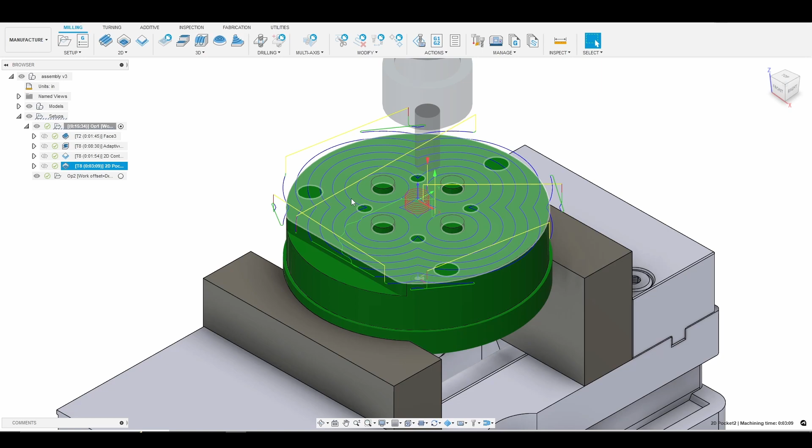This is the third tutorial for our microARC Vise fixture plate. What I've done here is set up ahead of time a 2D pocketing toolpath, which we will delete. If you watch the overview video, you'll know I mentioned I was not a fan of the surface finish I was getting using a standard pocketing toolpath, so I wanted to explain what was happening and why I didn't like it.

If we look at the toolpath, you'll notice as the machine walks around the outside contour of our part and works its way in, there are spots with a rapid change in direction. The machine has momentum, and the Tormach cannot transition instantaneously. So when it gets to these direction changes, it dwells there and you'll see a swirly tool mark. I was not a fan of that, which is why I decided to move away from the pocketing toolpath for the top of this part.

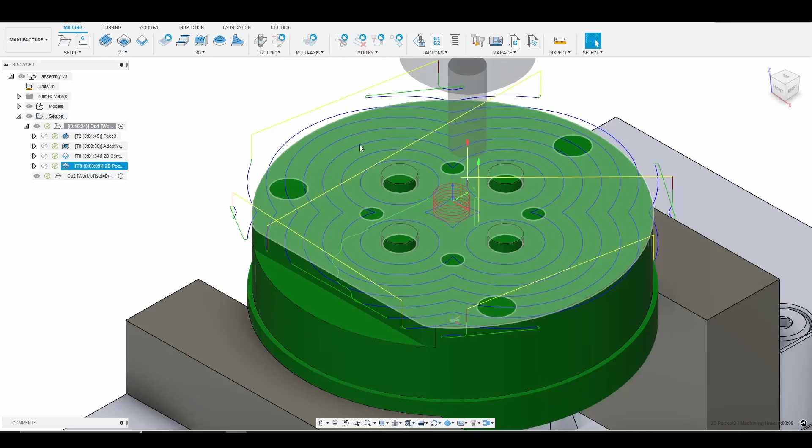Instead, what I discovered was a 3D flat toolpath. This is the first time I've used this toolpath, so I'll walk my way through it, and we'll examine the surface finish and see why I liked it better than the pocketing toolpath. So let's go ahead and delete the pocket.

Now we'll go ahead and create our 3D flat. We'll go up here to 3D and hover over 3D flat. With all of the 3D toolpaths, Fusion 360 takes our geometry into consideration, so it's going to find all the flat areas in our part and finish them for us.

So we're going to select the toolpath, and again we're going to select the same 3/8 inch 3-flute Gorilla Silverback end mill. We'll select OK. We're running at 7,500 RPM since we're finishing. I'm going to leave it at 30 inches per minute. There's only 10 thou on the floor, so we could go much faster if we wanted, but again, finishing, so I'm going to go nice and slow.

In terms of geometry, normally because it's a 3D toolpath, Fusion 360 takes the geometry into consideration for us, and I would typically skip this tab. But what I want to do is enable avoid touch surfaces, and I want to make sure that we do not touch the pins.

So we'll create a separate 2D contour toolpath and enable the wear compensation. That way, after we machine around the pins, if it doesn't fit, we can enter a negative tool diameter in Path Pilot and just rerun that toolpath again, walking around the pins until they do fit. So we have the pin selected, and I'm also going to select the sidewall here.

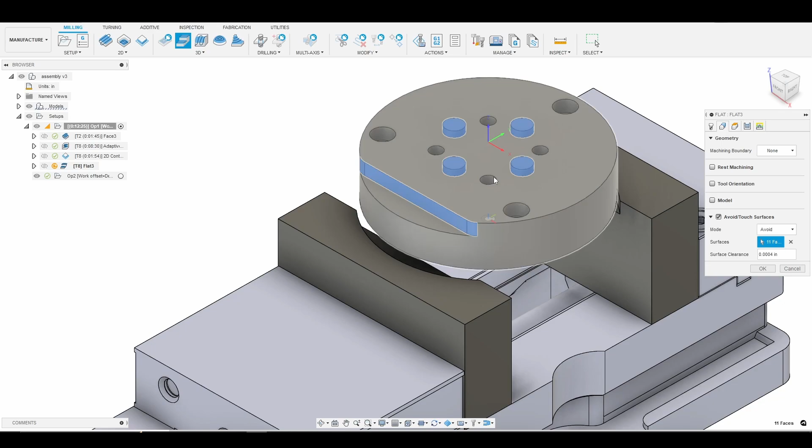Now we have the surfaces that we don't want to touch. We'll go to our heights tab, and for our top height, since we've already removed all the material off the top, we are just going to select model top.

Then we'll go into our passes tab where things get more interesting. Again, I want to avoid a pocketing type strategy, and instead I would like to do a parallel pass. As you'll see here in a minute, it gives us a more uniform toolpath, sort of like a facing operation, and to me it just looked more visually pleasing. So I'm going to go ahead and select that.

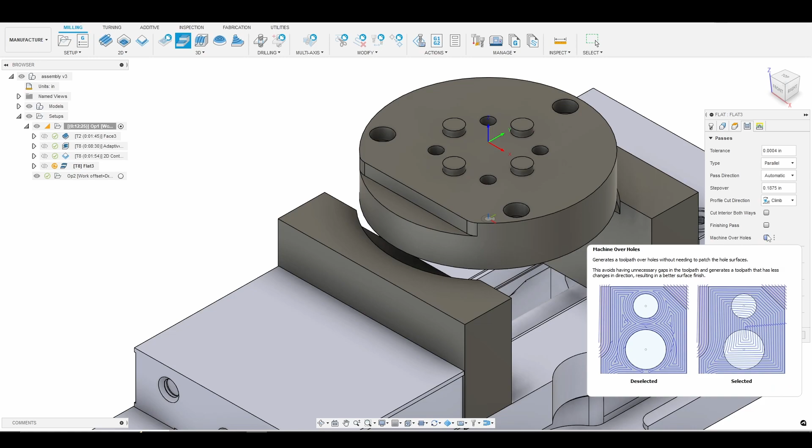For the step over, I'm going to use 50% diameter of the tool. And then I am going to select machine over holes. You see a bunch of holes that we will drill here in a minute, so if we hover over machine over holes, it literally does that—it machines over the holes instead of avoiding them. So I'm going to select that.

The next thing I want to do is go to stock to leave. I don't want to leave any stock on the floor, but I do want to leave at least 10 thousandths on these pins so that if we need to, we can walk them into tolerance. So I'm going to leave 10 thousandths on the sidewalls, and leave nothing on the floor.

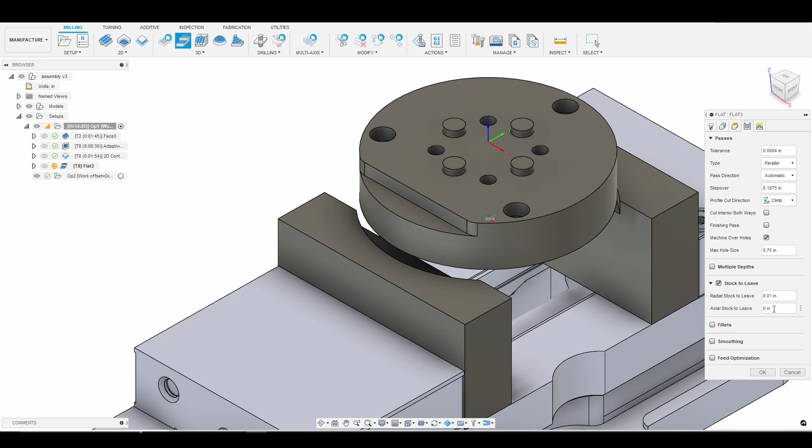I'll go ahead and enable smoothing and feed optimization, and that should do it for this toolpath. So we're going to go ahead and click OK. Give Fusion a minute to generate it, and now again we'll just go ahead and right click and simulate, and we'll just sort of look at what happened.

Slow it down a hair. So there we go. And so you'll notice again, it's sort of like a facing operation where we're just going left to right, and it's a more uniform surface finish, and we don't leave those tool marks all the way down the part going toward the center.

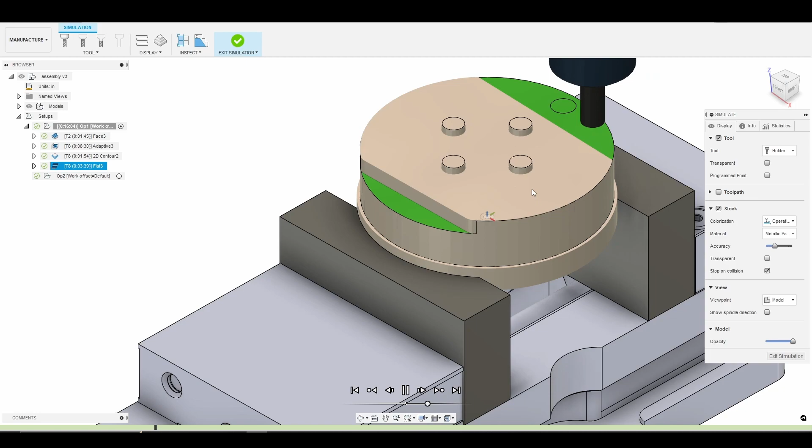All right, so what I'll do now is I'll just go ahead and speed it up a little bit so we can get through it. Again, it's avoiding the pins. It will go through here in a minute and just clean up that excess stock, but it does avoid the surfaces we told it not to touch. There we go. So we'll go ahead and exit.

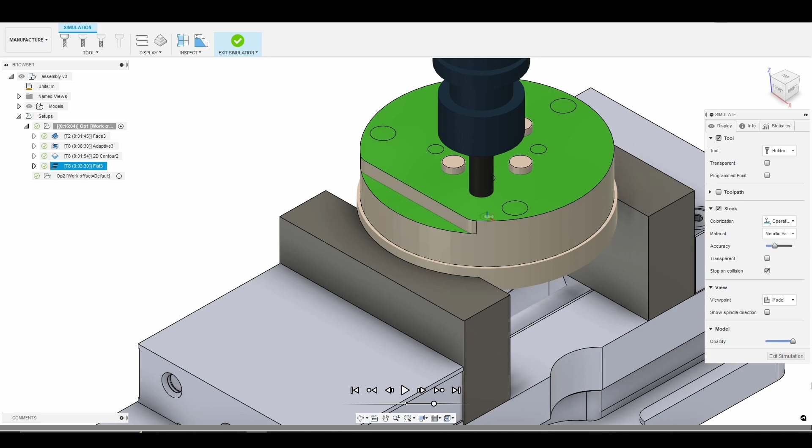So that does it for the 2D flat. So I hope you guys enjoy that.

So what I'm going to do now is go ahead and create the 2D contour. So we will go up to 2D, again, contour. And then what I'm going to do is, of course, select the same 3/8 inch Gorilla Silverback 3 flute. Select OK for finishing. So I'm OK with leaving it at 30 inches per minute, 7,500 RPM, little over 1 thou per tooth.

Going to go to geometry, and all we're doing here is finishing the pins and this sidewall here next to the flat. We'll go into our heights again, model top. We've already faced all the material off the top of our model. And now we'll go into passes.

And what I want to do here is I want to enable stock to leave. And so what I want to do is avoid touching the floor that I've already finished. So we're going to leave no radial stock on the sidewalls, but we will leave 1 thou on the floor just to not touch the surface that we finished.

The next thing I want to do is change the compensation type again to wear. That way we can enter a negative tool diameter in Path Pilot. So if for some reason after we machine the pins they're too big, we can just walk them into tolerance.

And what we want to do is just go ahead and spot drill all of our holes. So I'm going to select a tool, go to my Tormach 770 library, and I want the 1/4 inch spot drill. It's 140 degrees to match the drill point angle on all of my carbide drills. So we're going to go ahead and select that, select OK.

Everything here is fine, running at 5,000 RPM, and we're just plunging at 13 inches per minute. So what I'm going to do now is go to geometry, and we're just going to select all of the holes.

All right, so that looks good. The next thing I want to do, and we could have selected same diameter if we wanted, but I just clicked on all the holes. It was rather easy.

So we'll go to our heights, and now we want to be careful here. We don't want to go to tool bottom. If we tried to plunge that spot drill all the way into the bottom of the hole, we are going to crash our machine, ruin our part, and break the spot drill. So what I want to do is I want my top height to be the top of the hole. That's fine. And then I want my bottom height to be the top of the hole, and I'm going to go down 45 thousandths just to get the drill point in the top of the hole. And so I need a point there. So that should be good.

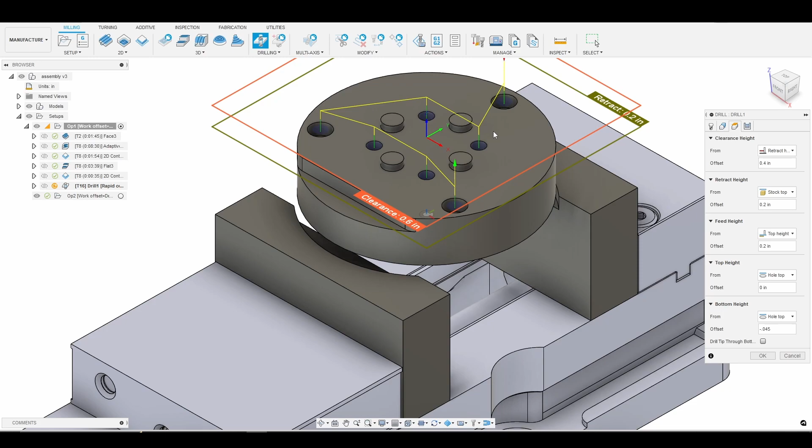So now we're just going to drill in and rapid retract and make all of our spots. Yep, drilling with a rapid out, so that's fine. Again, we'll let Fusion generate the tool path and we will go ahead and simulate.

Go ahead and press play. So there we go. We just simply went through and spotted all of the holes, nothing major here. So now what we want to do is we want to go ahead and do our deep drilling cycle where we go ahead and peck all the way through the part. So we'll do that now.

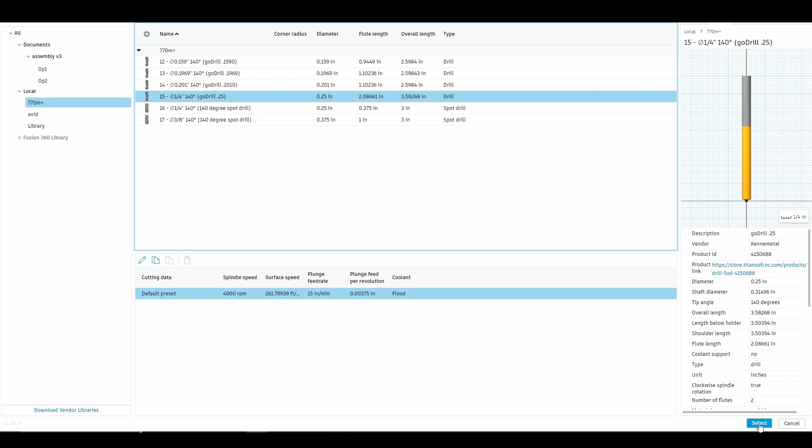So I am going to go to drilling again, and this time we are going to go to the Tormach library that I set up and choose the 1/4 inch drill. And again, this time we were at 4,000 RPM and we're plunging in at 15 inches per minute.

I'm going to go ahead and again just sort of click all of the holes. So to save time, I could have duplicated the spot drilling toolpath and then changed the tool and changed the drilling operation, and it would have left the geometry selected for us. So that's something I could have done to save time, but there's not a lot of holes, so it was easy to just go ahead and make a separate toolpath.

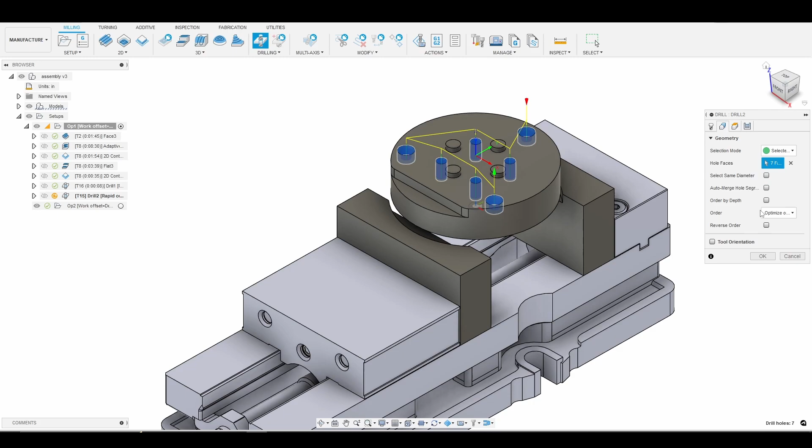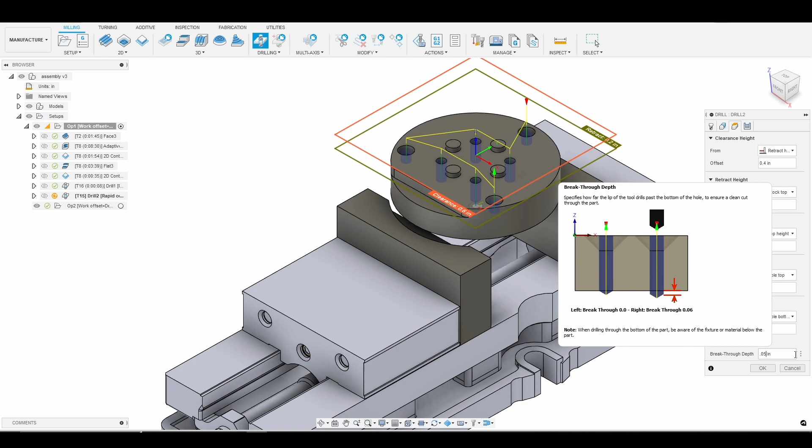All right, everything here looks fine. What I'm going to do now is go to heights. Now here, the only thing I want to do, so we do want to drill from the top of the hole to the bottom of the hole, except I want to drill the tip through the bottom, and I'm going to go an extra 50 thousandths just to make sure that we break all the way through the hole. So if I hover over this, it should explain. So we're just making sure that we go 50 thousandths past our drill point. That way we go all the way through and we have a nice exit in terms of our hole. So when we go through on the backside and do the chamfer, we won't have to worry about there being any large pieces of stock or anything like that left over.

All right, so now we'll go to cycle, and what we want to do here is we want to go deep drilling with full retract. Pecking depth, I am going to change that to 30 thousandths. Okay, so that should do it.

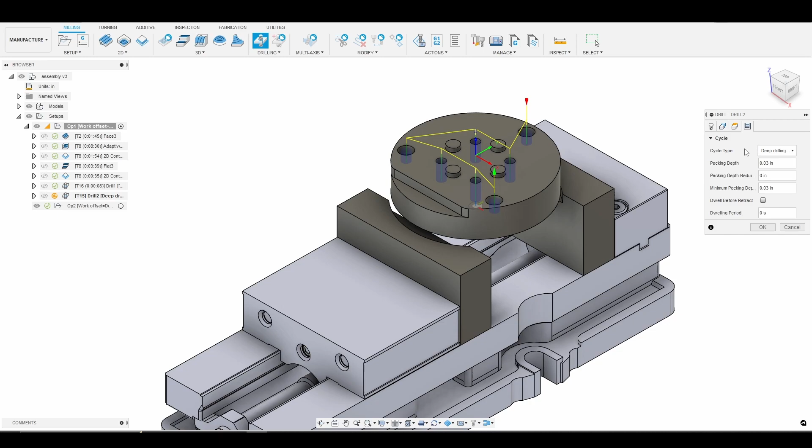So we'll just go ahead and click OK, and then again we'll simulate. And what I do like to do with the drilling is I like to use flood coolant just to make sure, especially, I mean, I'm drilling right around an inch. So I'm going an inch deep essentially into this material, and I want to make sure that I have decent chip evacuation. So I tend to use flood coolant when I am drilling rather than using the fog buster.

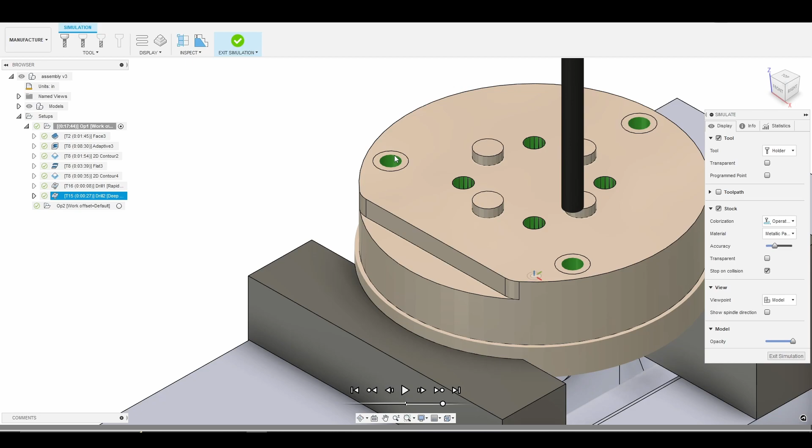So we'll just go ahead and simulate. And so what we're doing is just going through and pecking our way all the way through. So we'll go ahead and speed it up a little bit. There we go. And so the next thing we want to do is we want to go ahead and clear out the countersink here. So we'll just use a pocketing operation to do that so that our socket head cap screws will go ahead and fit all the way inside flush with the top surface of our part.

So we'll go ahead and exit simulation. We'll go back to our home view. All right, so now we'll go ahead and go to 2D Pocket. We'll go to our tool library, to my 770 library. We're going to select the 1/8 inch 3-flute end mill from Shard Tools. We're going to run at 8,000 RPM, but we're going to drop the feed rate slightly and go 25 inches per minute. So we're going to be conservative, and I'll show you why in a minute.

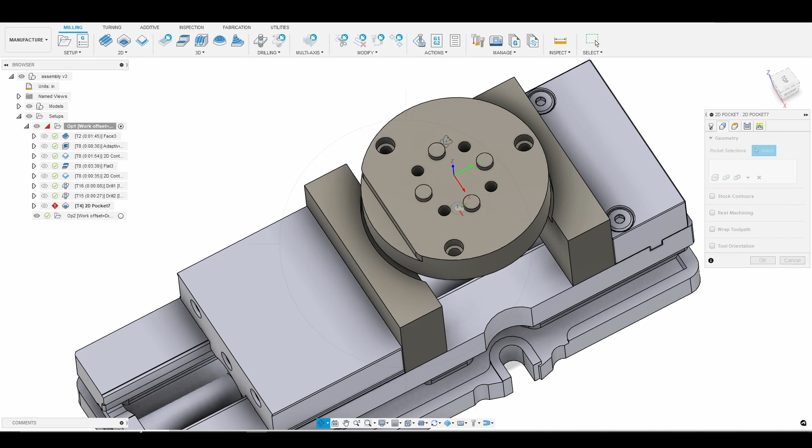We're going to go to the geometry page, and I'm just going to orbit so I can see the inside of our mounting holes. So what we're essentially doing here is we're going ahead and clearing the countersink for our M6 socket head screws. So the socket head screws should mount inside of our holes and go just a little below the surface here. That way there isn't any interference with our vise.

And we're being conservative because we're going to plunge all the way down, full depth of cut, and then work our way through the pocketing operation.

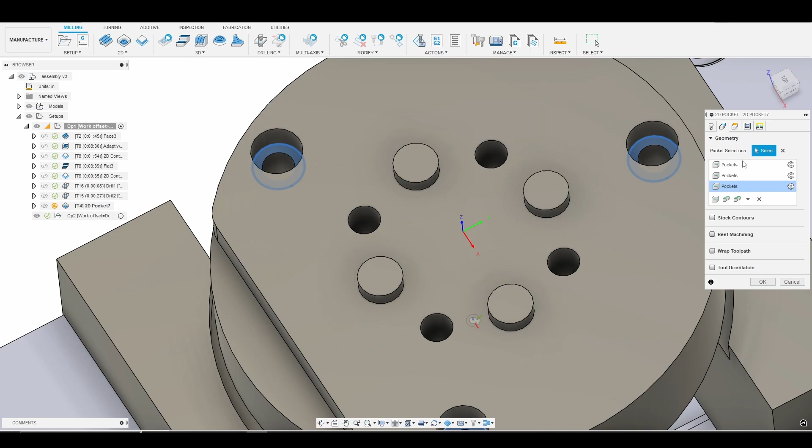Now we'll go to heights and reset our view so we can see. Again, we want to use model top, not stock top. We will go into passes.

We're going to have our maximum step over at 15 thousandths. Again, we're being conservative because I don't want to break my 1/8 inch end mill. I've already gone through 2 of them in the past week.

All right, so the next thing we're going to do is enable the finishing passes, and we want that to be 10 thousandths. And what we're going to do here is go ahead and do a 50 thousandths finishing overlap. All right, that's fine.

No stock to leave, no multiple depths. I will enable smoothing and feed optimization.

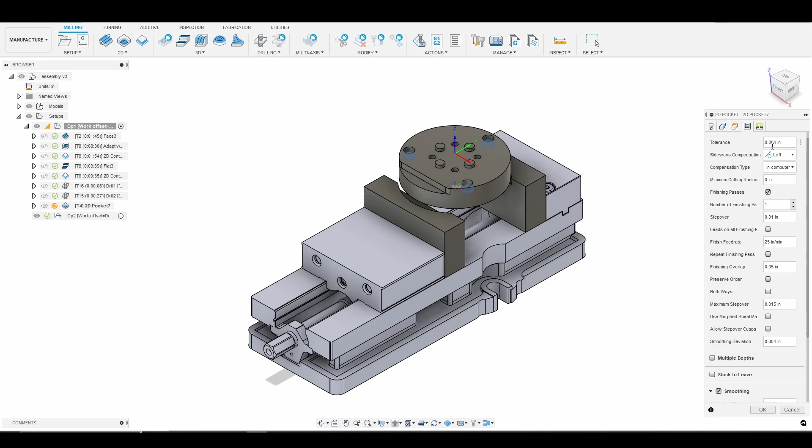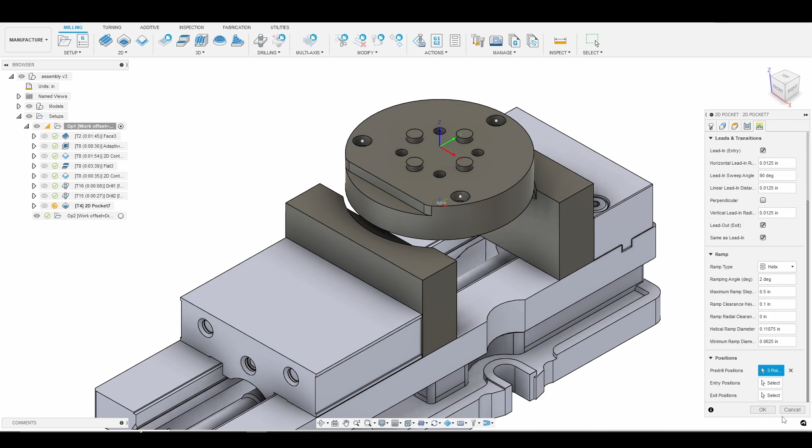So the next important thing we need to do is go to linking. Since we already pre-drilled these holes, we don't want to do a ramp or helical entry. What we want to do to save ourselves time is go down to where it says position, click select under pre-drill position, and then select the holes that have already been pre-drilled. The tool should go ahead and plunge into the center of the circles and then work its way through the tool path. That way, again, we don't have to do a ramp or a helical entry. So we'll go ahead and press OK.

And then we will simulate to make sure that that is the case. I'm going to right click, go to simulate, and then just use the timeline here. What I want to make sure of is that the tool holder doesn't contact the surface of the part. I've done that before, it's not fun.

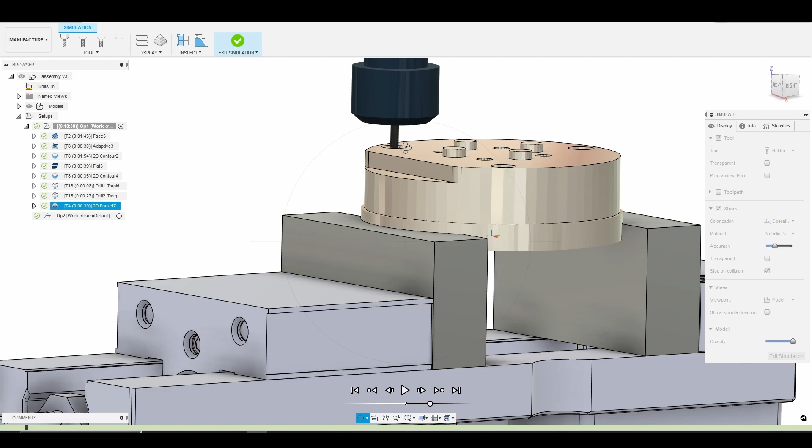And I want to make sure that as we're plunging down, we're plunging into the center of the hole and not directly into our stock. I've done that before too, and trust me, it's not pretty. So we want to avoid those sort of crashes.

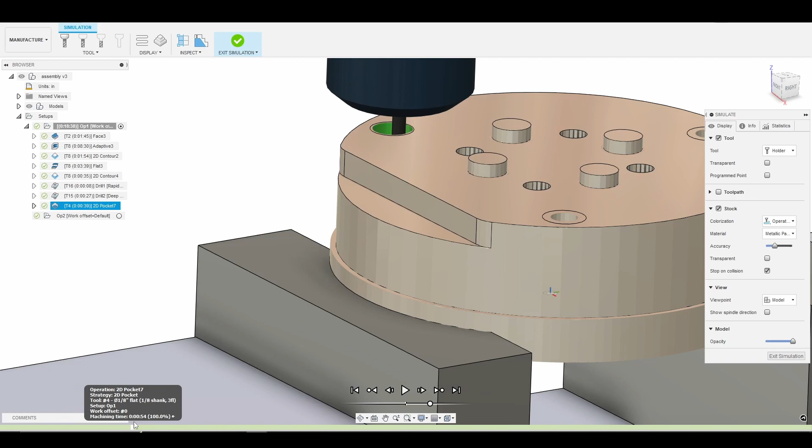And everything looks fine. We just work our way through the pocket, clearing a path for our M6 screws. We'll go back to our home view, and then finish walking our way through the tool path. So everything looks good there.

So now all we need to do is finish our Op1 by chamfering all the edges, making sure there's nothing sharp that could cut someone's finger, and making sure everything's nice and smooth with no burrs. So we'll go ahead and do that now.

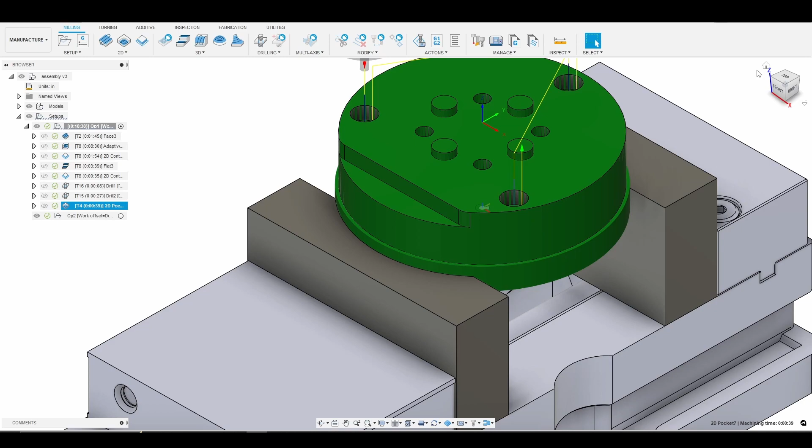I'm going to go ahead and go to 2D chamfer. Now what I'm going to do is select a 1/4 inch chamfer tool from Gorilla Tools, our lemur chamfer. So we'll select that tool.

We're running at 4,000 RPM and 20 inches a minute. Again, we could push the feed rate up if we wanted, but I'm not going to. We're right at around 1 thou per tooth.

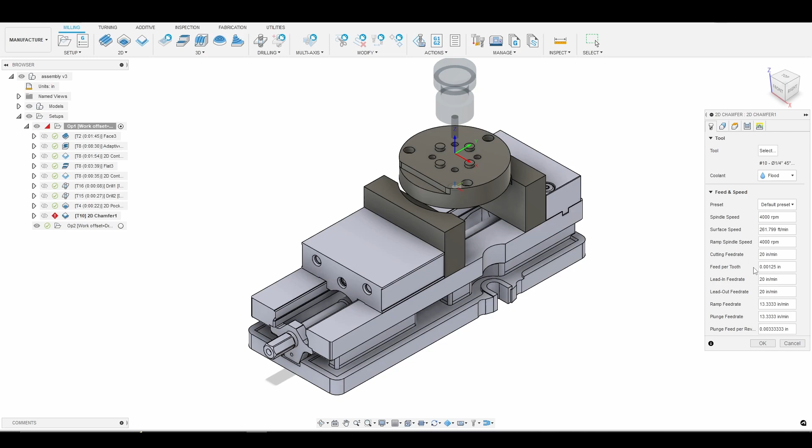For geometry, we are going to finish essentially all of our edges around the holes, around the outside of the part, along our flat. And we're also going to chamfer the top of the pins. Okay, so that should do it there.

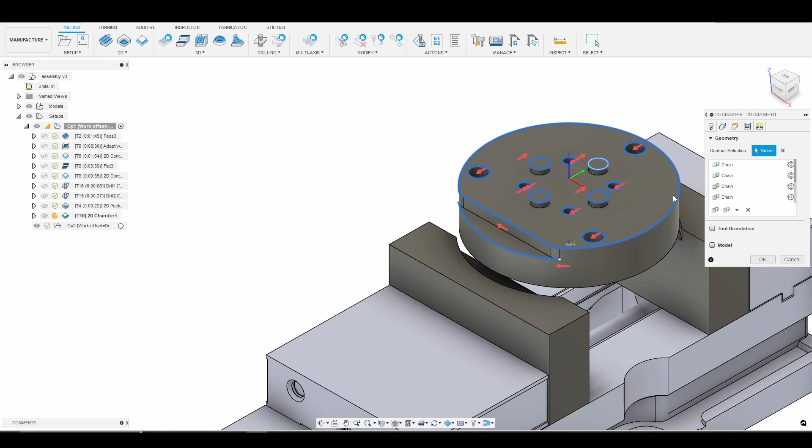The next thing we'll do is go to our heights. Again, model top instead of stock top. Selected contour for the bottom height is perfect.

We'll now go into passes, and I'm going to do a 10 thou chamfer. Chamfer tip offset is fine. Enable smoothing and feed optimization, and that should be everything. We'll change the lead-in sweep angle to 45 degrees.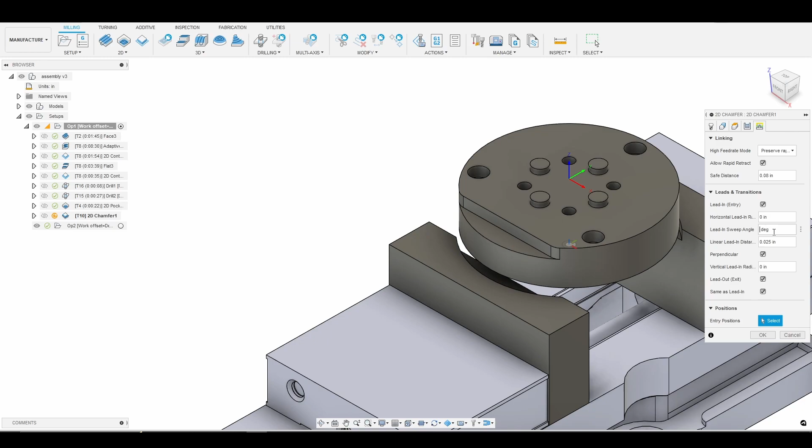And we will go ahead and generate the tool path. Now we'll simulate to make sure we don't crash our machine. There we go. So we just start walking around the pins.

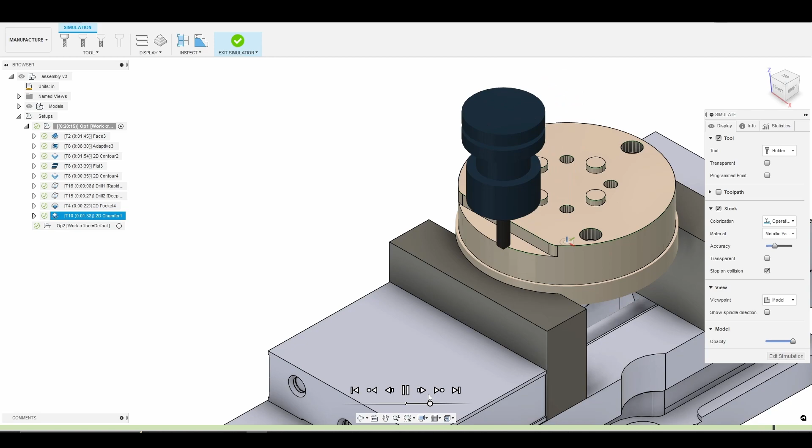So we'll go ahead and speed it up a little bit. Then we chamfer all of the holes and then the outside of the part, and here in a second we'll do the bottom of the flat. There we go, so that's it for the chamfer, and that's it for Op1.

I hope you enjoyed. What we'll do now is look at the tool paths, or the operations being performed on the Tormach. I hope you enjoy, and I'll see you in the next tutorial where we will start getting into Op2.

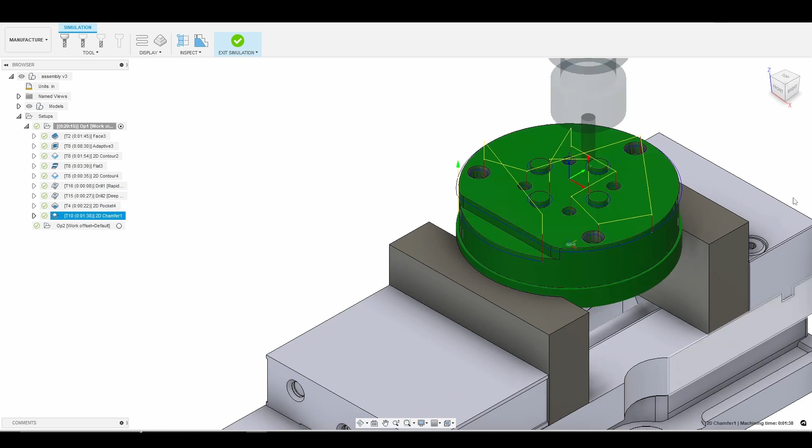Alright, so now we start with the 3D flat toolpath using a 3/8 inch 3-flute Gorilla Silverback end mill, running 30 inches per minute, 10 thou depth of cut, and 50% diameter of the tool for width of cut. I like this toolpath because it gives you the option to use parallel, which gives you a nice uniform surface finish that is similar to a facing operation.

Now we get into our drilling operations. We do the spot drill with the carbide spot drill from Shars Tools, running at 13 inches per minute, and we're just going down 45 thousandths. The spot drill has the same tip angle as the carbide drill we'll use next, which is right here. Again, this is a deep drilling cycle with full retract.

I'm using a 1/4 inch Kennametal Go drill, 15 inches per minute with a 30 thousandths peck. I do have my flood coolant enabled here simply because it gives me superior chip evacuation, which I tend to prefer, especially if I'm doing deep drilling.

I use green cut coolant just because it has the safest materials safety data sheet I could find. I didn't want anything that could potentially harm me or the environment, especially if you have any leaks in your Tormach. You don't want that all over the garage if you have animals or small children around.

So now we're going to go ahead and clear the way for our M6 socket head screws. We're using a 1/8 inch Shars 3-flute end mill, 25 inches per minute, a 1/4 inch depth of cut, and 15 thousandths width of cut. Again, we're just going through and clearing the counterbore so we can install our socket head cap screws and mount the fixture plate to the microARC, which you see there on the left.